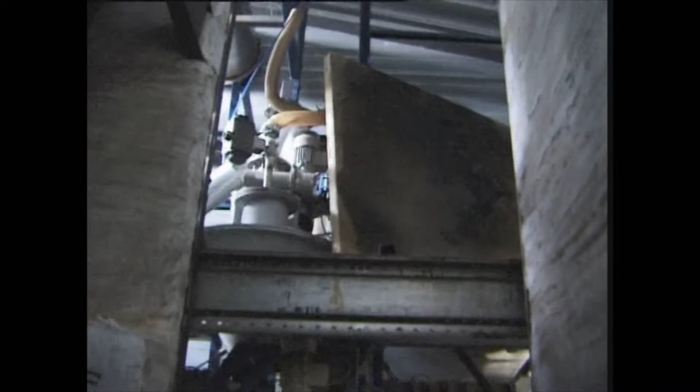A pilot plant has been tested since 1997 and has proven reliable at this scale. Now, the first commercial production unit has been delivered. This film will show you the background, the principles and the possibilities of this technology.

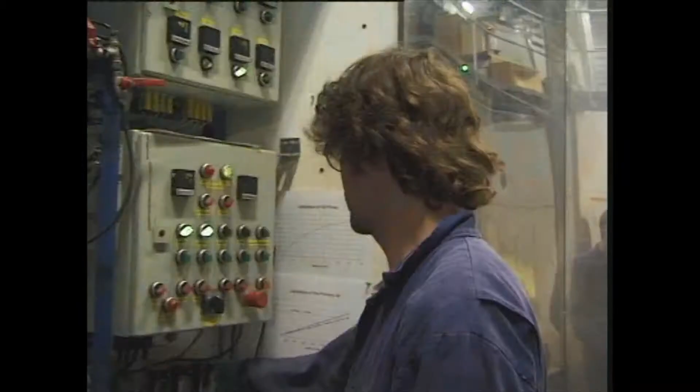Bioenergy technologies use renewable biomass resources to produce, for example, electricity, heat, automotive fuels and chemicals. The current EU target is to double the share of renewable energy in primary energy production, from 6% in 1997 to 12% in 2010.

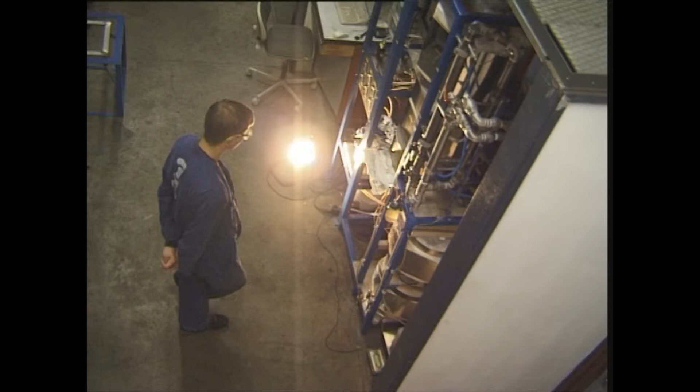BTG Biomass Technology Group has, over the last 25 years, specialized in the process of converting biomass into biofuels and bioenergy.

BTG's two business units, consultancy and R&D, work in synergy. This unique combination is the base for highly innovative and commercially feasible activities.

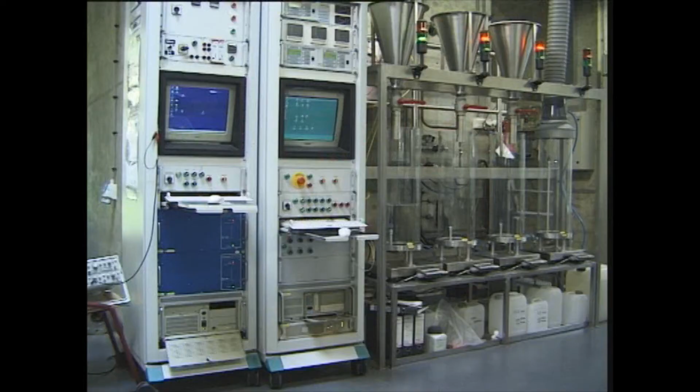BTG wants to contribute to a sustainable energy society. To achieve this, BTG works on the development of technologies that help biomass replace fossil fuels.

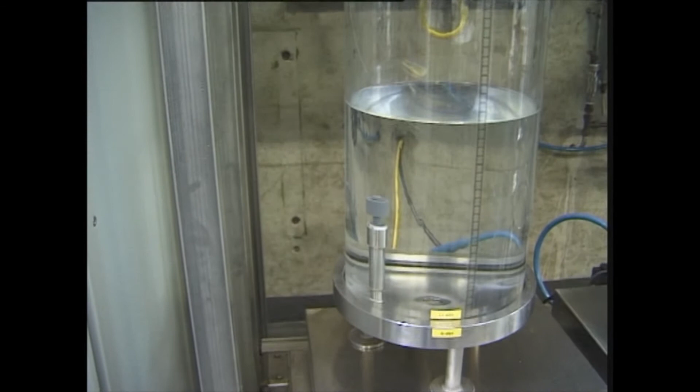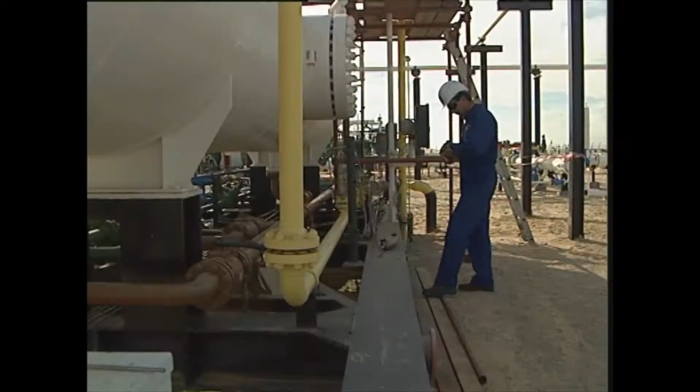Coal, oil and natural gas are non-renewable fossil fuels. These are produced in naturally occurring processes in which organic material is converted over a period of millions of years. BTG strives to dramatically reduce the conversion time of this process.

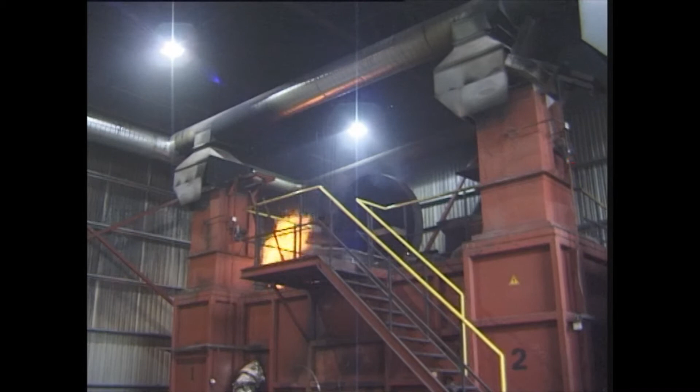For example, biomass carbonization as a technology to substitute coal, biomass gasification to substitute natural gas, and biomass pyrolysis to substitute crude oil. The rapid conversion of biomass into biofuels raises the energy density of the biomass.

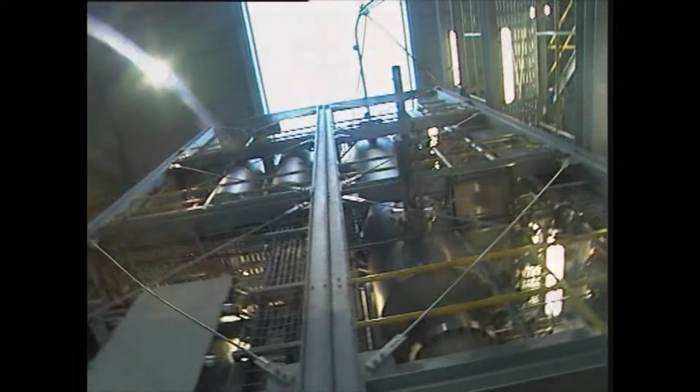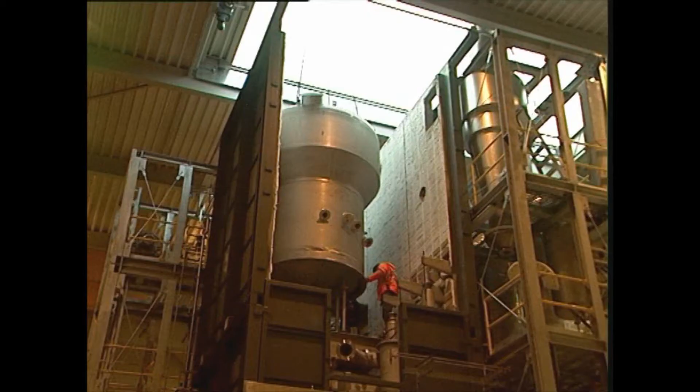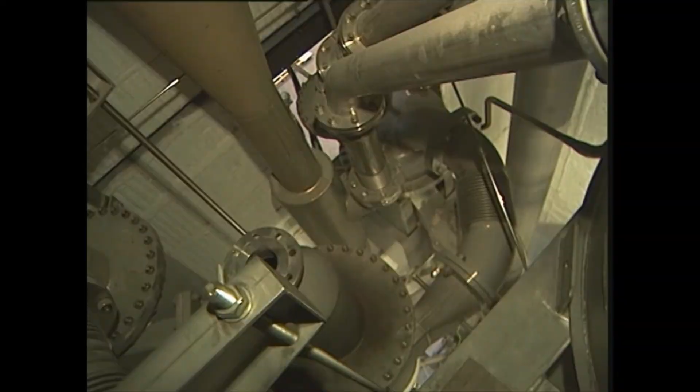BTG has developed a patented biomass pyrolysis process. The base for this technology was an invention from the University of Twente in the early 90s. The fast pyrolysis process is further developed and scaled up by BTG, who is now a prime supplier of the technology. Fast pyrolysis transforms difficult to handle biomass into a clean and uniform liquid, pyrolysis oil.

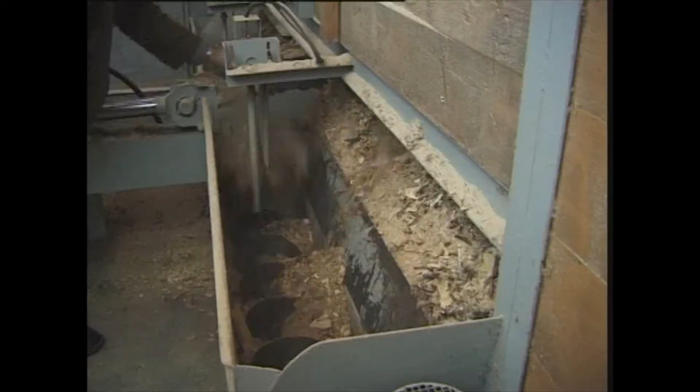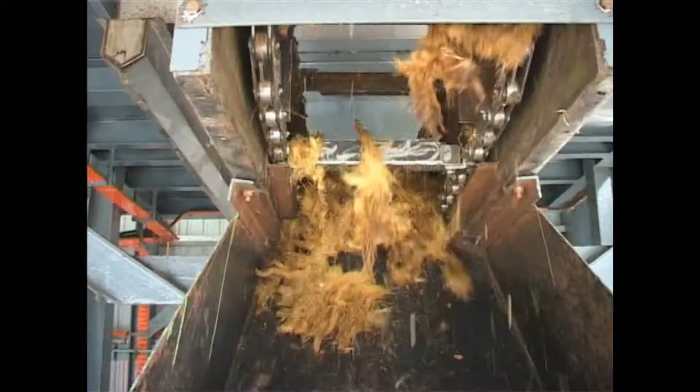A wide variety of feedstock materials can be processed by fast pyrolysis. Examples are wood, straw, rice husk, bagasse, sludge, palm residues and many more. The particles must be reduced to a size below 10 mm. The moisture content should be below 10 weight%.

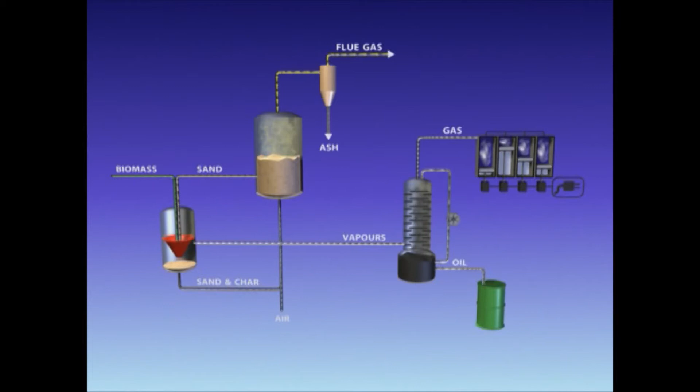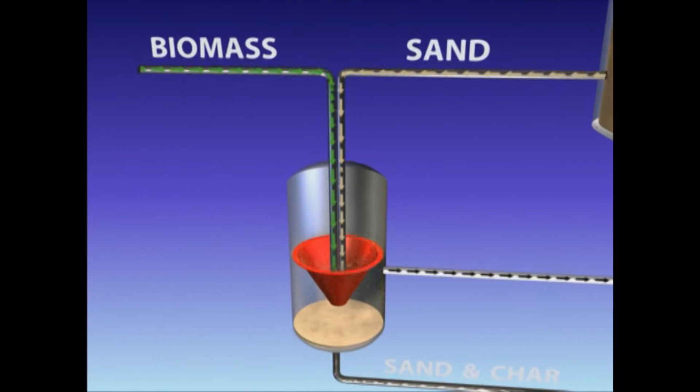BTG's fast pyrolysis technology is based on the rotating cone reactor. Biomass particles at room temperature and hot sand particles are introduced near the bottom of the cone. There, the solids are mixed and transported upward by the rotating action of the cone.

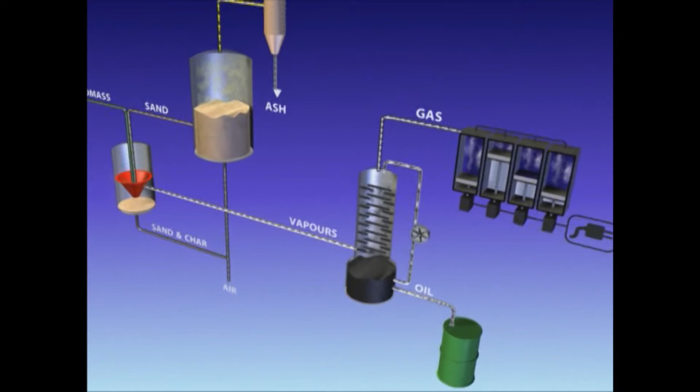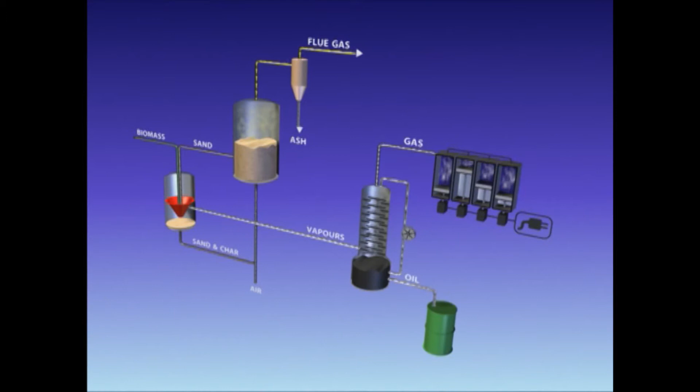In the process, up to 75 weight% pyrolysis oil and only 25 weight% char and gas are produced as primary products. Since no inert carrier gas is used, the pyrolysis products are undiluted. This undiluted small vapor flow results in downstream equipment of minimum size.

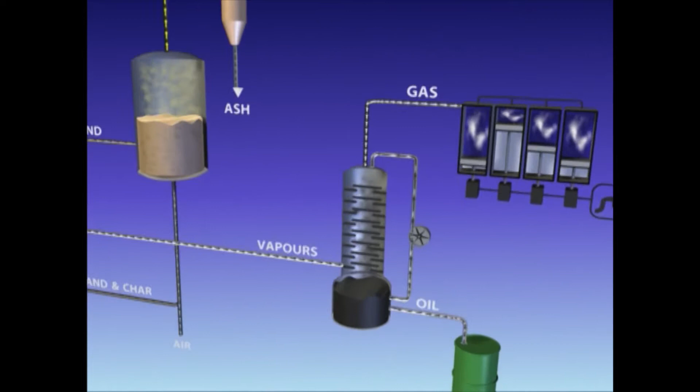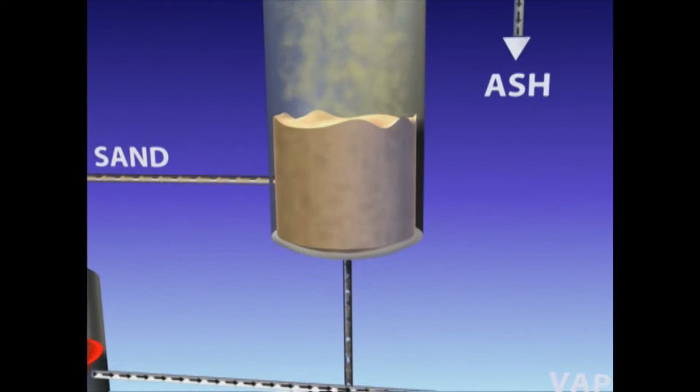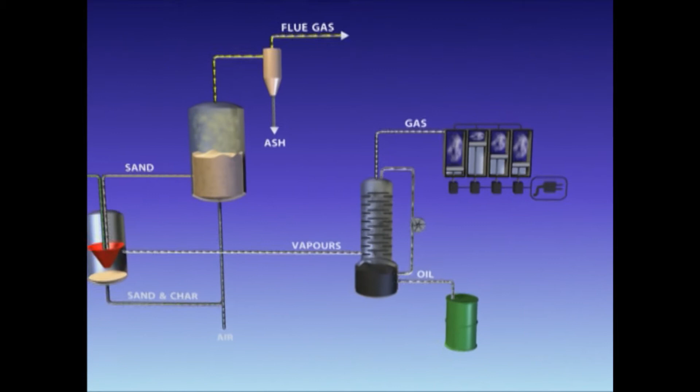In only a few seconds, the biomass is transformed into pyrolysis oil. Charcoal and sand are recycled to a combustor, where charcoal is burned to reheat the sand. The permanent gases can be utilized in a gas engine to generate electricity or simply be flared off. In principle, no external utilities are required.

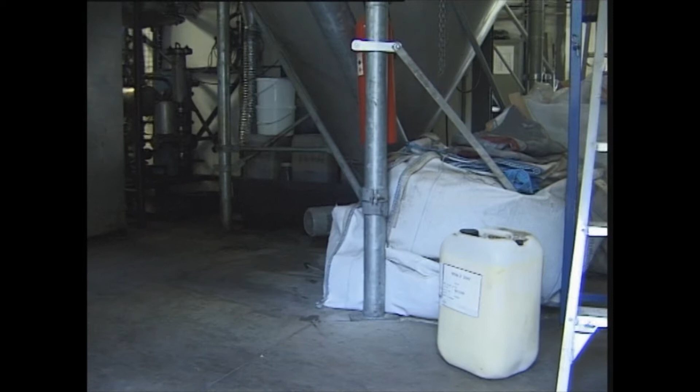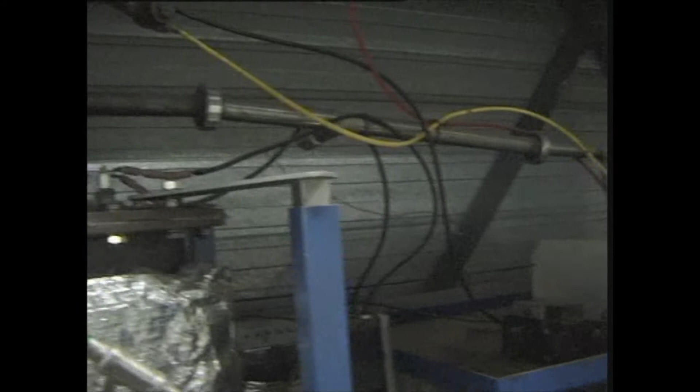BTG has a 1 megawatt thermic pilot plant available at the BTG laboratory. This pilot plant has been tested for many types of biomass and residues. The pilot plant has produced about 100 tons of pyrolysis oil.

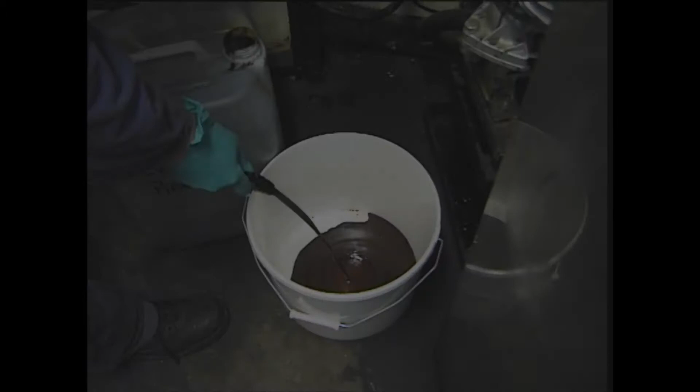Pyrolysis oil can be used in a large number of applications, which can be divided into 4 main groups: heat, power, transport fuels, and chemicals. Pyrolysis oil combustion in a boiler or furnace for heat is shown to be the most simple application.

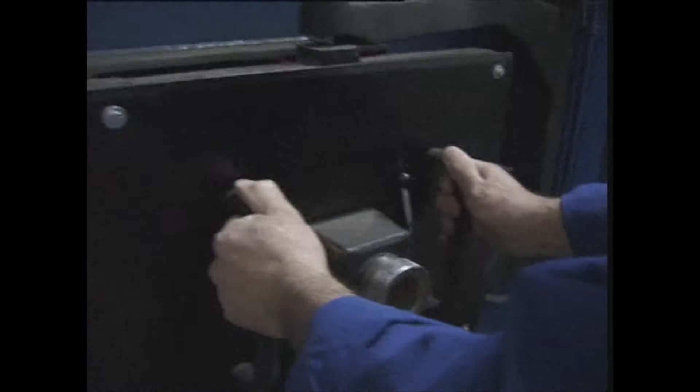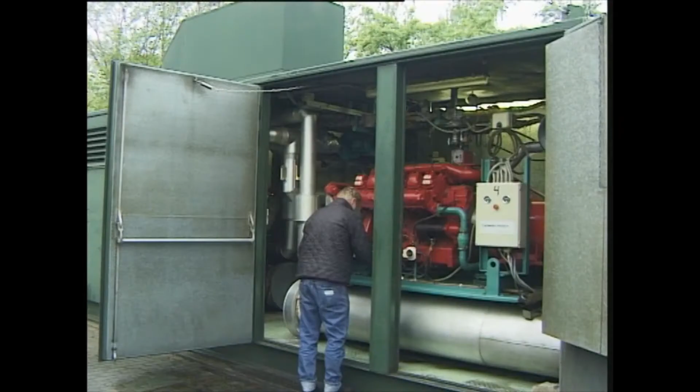Co-combustion of pyrolysis oil in an industrial power plant has been successfully demonstrated. Diesel engines and gas turbines for power production have been tested on pyrolysis oil. Some development is still required, and commercially available engines or gas turbines will be adapted within a few years.

Also, transport fuels can be derived from pyrolysis oil, either by direct upgrading or by gasification combined with gas-to-liquid synthesis. Last but not least, potentially high-value chemicals can be extracted from pyrolysis oil, like adhesives for wood, preservatives, flavouring of food and more. These applications need further development.

Recently, BTG has delivered a 10 megawatt thermic pyrolysis production plant to Malaysia. Malaysia can be seen as one of the so-called green OPEC countries. These are countries that have the potential to develop into large suppliers of biofuels. Other green OPEC countries are, for example, Indonesia, Brazil, Canada, and northwest Russia.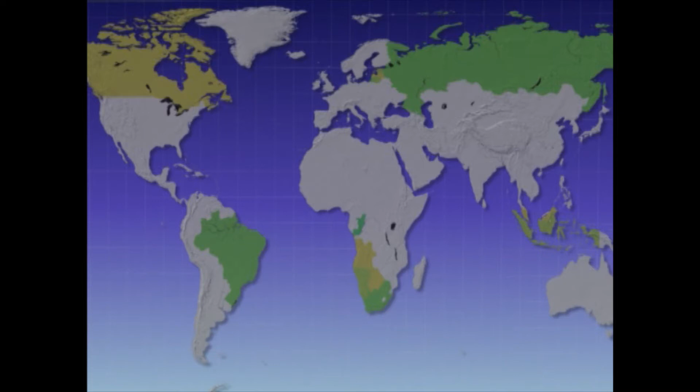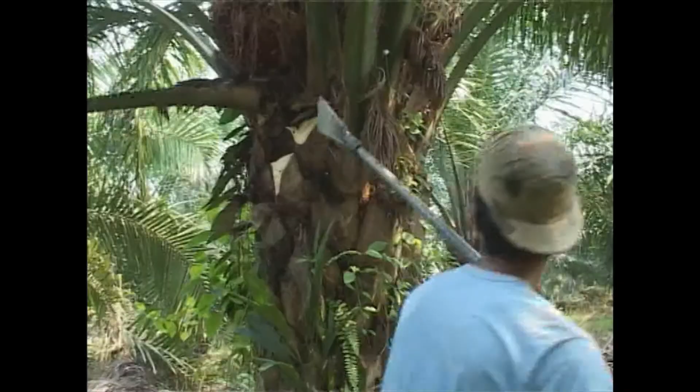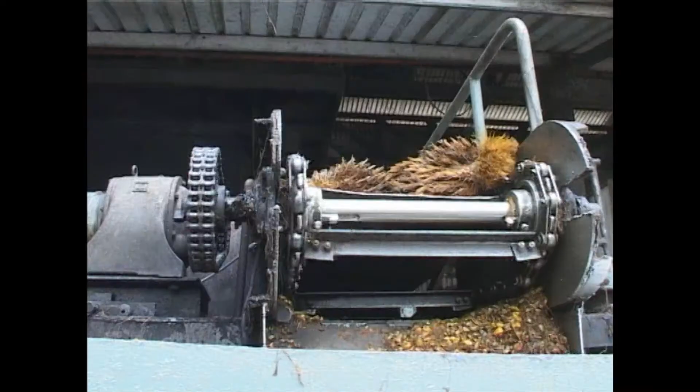In Malaysia, various biomass residues can be found, residues which are otherwise left in the field and would release large amounts of methane, a harmful greenhouse gas. In other cases, the residues are burnt in an inefficient manner to get rid of them. These residues are suitable for feedstock for the fast pyrolysis process. The organic part is used as energy carrier. Minerals can be returned to the soil as fertilizer.

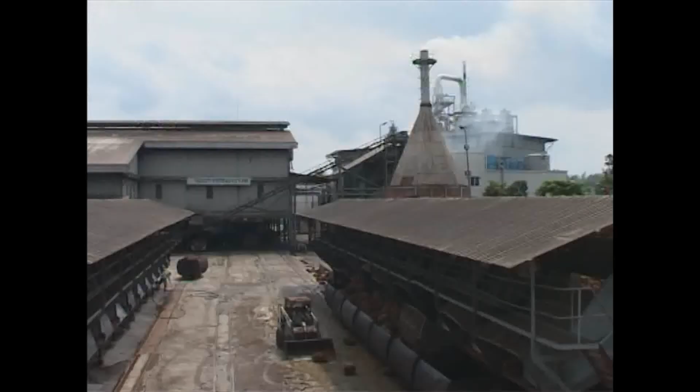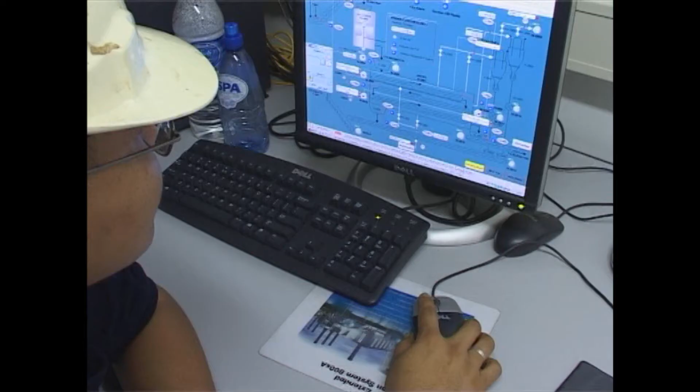A client of BTG in Malaysia, belonging to the top companies in Southeast Asia, worked together with BTG on the development of this commercial production unit for the pyrolysis of palm oil residues. This company is well respected for its integrity and corporate governance, and member of the Round Table on Sustainable Palm Oil.

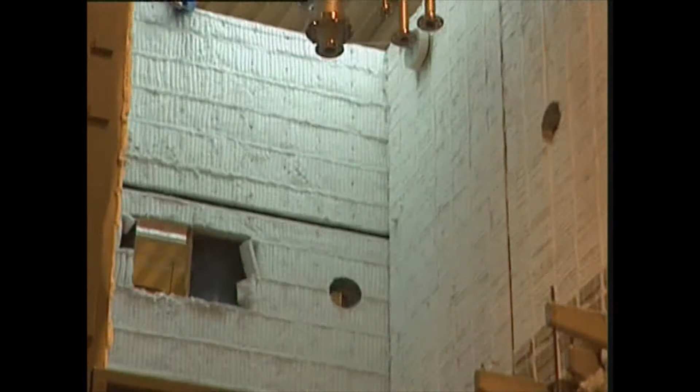The 10 megawatt thermic production plant was built in the Netherlands and disassembled and transported to Malaysia. The plant arrived in Malaysia in April 2005 and is operational since July 2005.

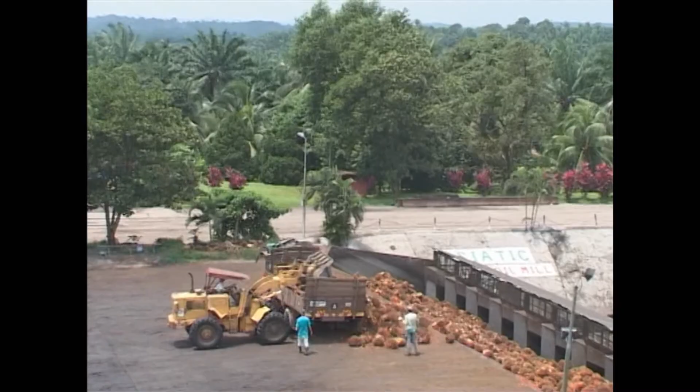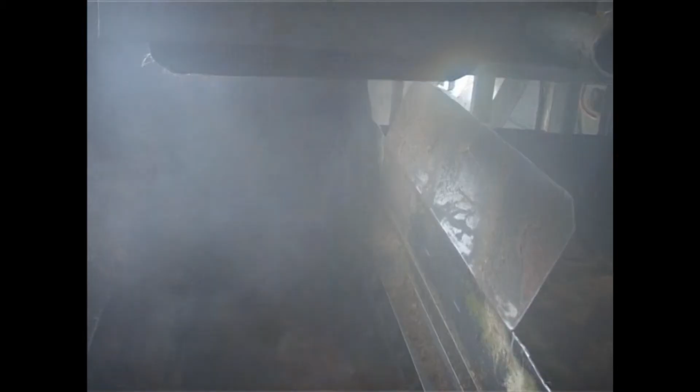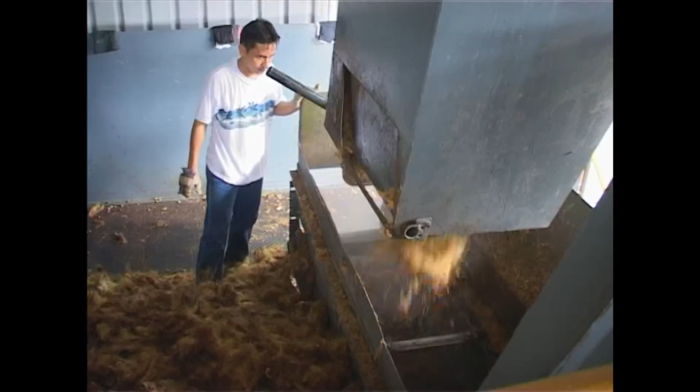As explained, the feedstock for fast pyrolysis needs to be reduced in size and the moisture content should be below 10 weight percent. The palm residues are reduced in size by a shredder and dried by a dryer. This pre-treatment is an integral part of the plant. Waste heat is available from the pyrolysis process for drying. The particles are conveyed through lock hoppers, separating the reactor from the feeding system.

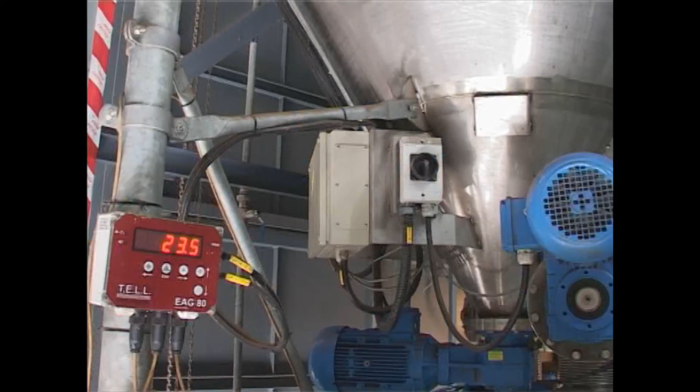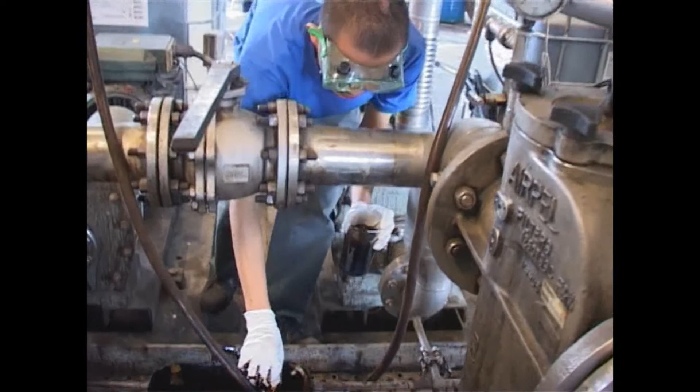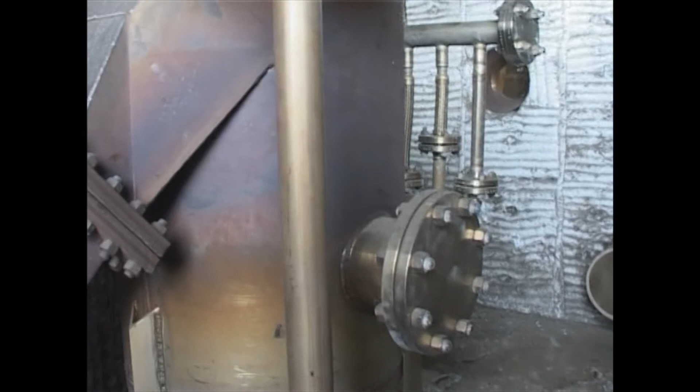The palm residue particles and hot sands are introduced near the bottom of the cone reactor. The solids are mixed and transported upward by the rotating action of the cone. In only a few seconds, the biomass is transformed to pyrolysis oil. Charcoal and sand are recycled to a combustor, where charcoal is burned to reheat the sand. The permanent gases can be utilised in a gas engine to generate electricity, for example. The pyrolysis oil is stored in large storage tanks.

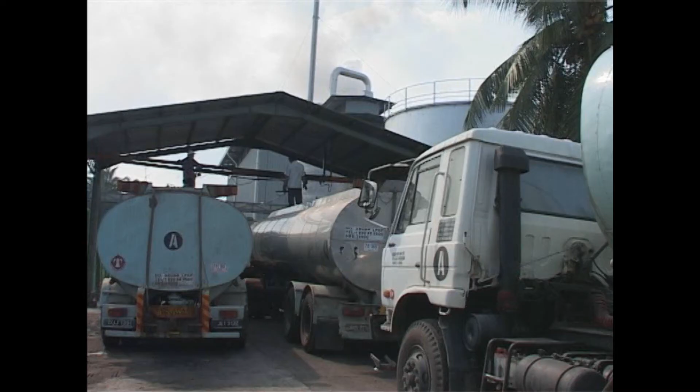The first commercial production unit has been put in operation now. Many more will follow. Pyrolysis oil or other biofuels will replace fossil fuels on the longer term. In BTG's vision of the future, the so-called green OPEC countries will develop into large suppliers of biofuels, like pyrolysis oil.

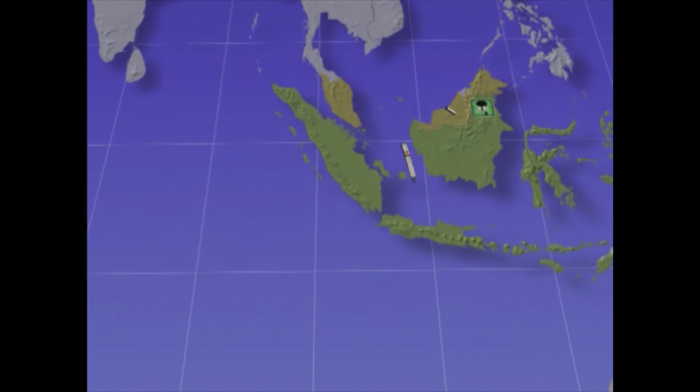Pyrolysis oil, produced from various residues in forests, at plantations or at agricultural sites, will be transported to nearby harbours. The pyrolysis oil can be transported overseas in bulk tankers to large industrial and utility sites elsewhere in the world. This allows the implementation in the existing infrastructure for liquid biofuel utilisation.

Further distribution to small-scale applications for standalone electricity, district heating or chemicals production is also possible. In this way, fast pyrolysis oil can be traded as a green commodity. It will partly replace fossil fuels everywhere in the world and contribute significantly to building a sustainable society.

We showed you the background, the principles and the possibilities of BTG's pyrolysis process, a technology developed by BTG, which is now commercially being applied.

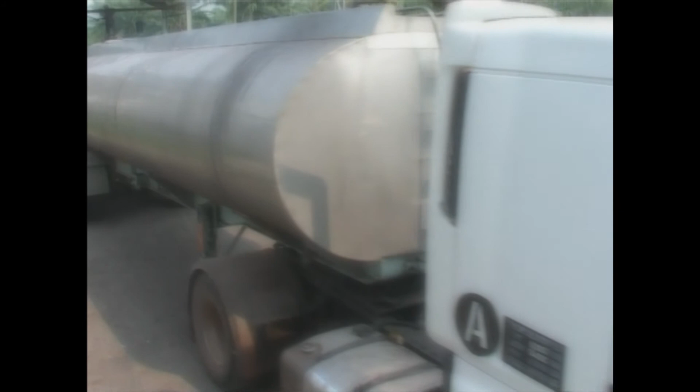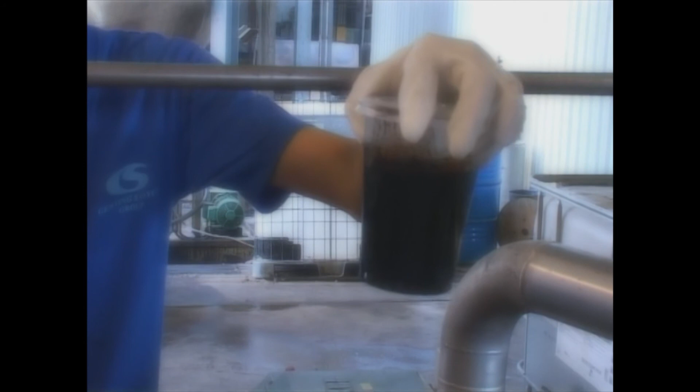BTG continuously works on the development of new technologies for the production of heat, power, transportation fuels and chemicals from biomass. Working closely with industrial partners, these technologies are scaled up to commercial scale production units. We warmly invite you to work together with BTG to further develop these technologies and work towards a more sustainable society.